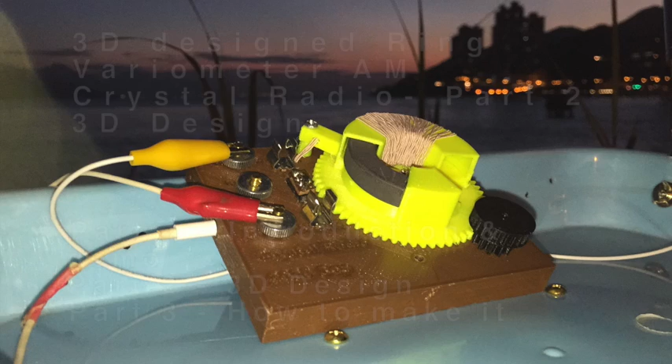So this is the 3D model I created using Fusion 360, and you can see that the joints are in action.

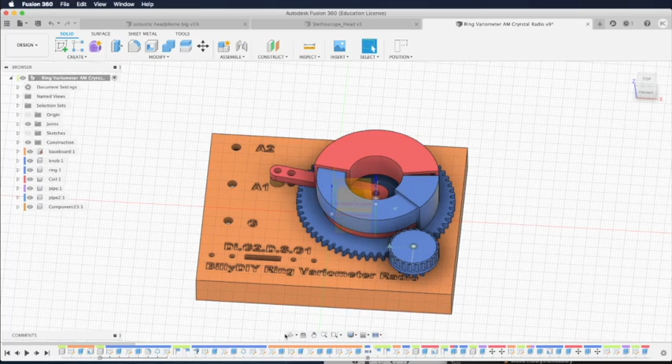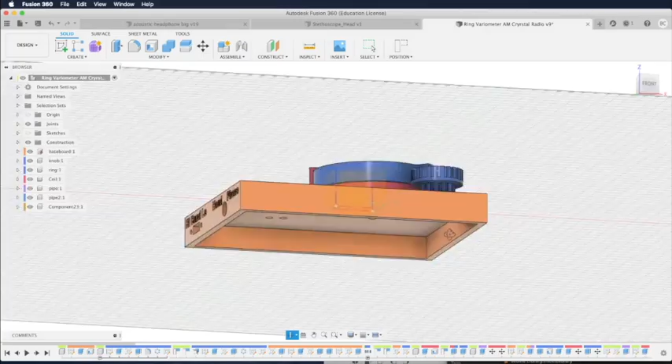So I created this with a hole for the band switch at the side and the headphone. At the bottom, we drill through all the holes for the detectors, crystals, diodes, and MOSFETs. Then there are holes for the pivot of the different gears. We have a small 12-teeth gear as the knob to tune, and then the 16-teeth, 60-teeth bigger spur gear as

the ring. You can adjust this parameter, user-defined parameters, to put in the value for different size of your ferrite core to auto-adjust the model generated. So you can go from a small core to a big core, from a thin core to a thick core in just a few steps.

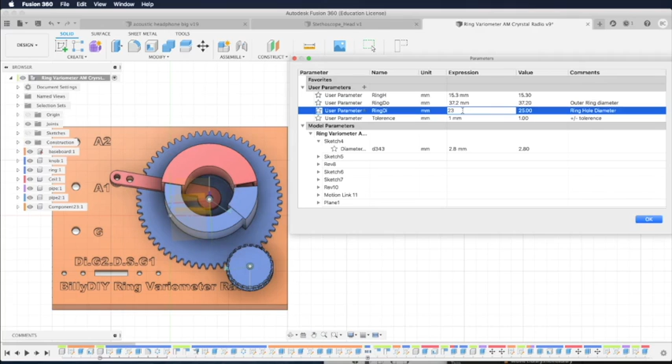But to save your time generating all this, I've created some STL files for 3 common sizes of ferrite core already on the Thingiverse site, so you can just go there and download.

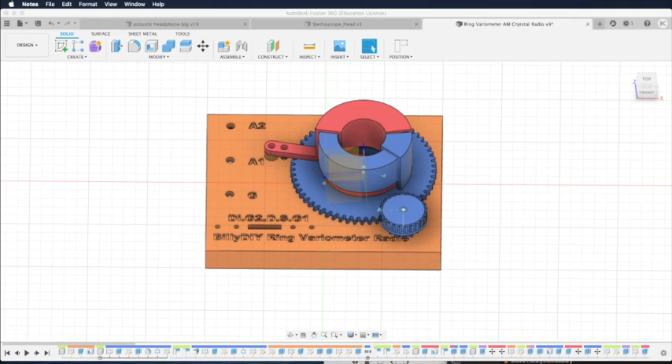Next, I'm going to show you how I create this one step by step. I will be using the video playback function of Fusion 360 to go through the timeline, and I'll describe what happens there. If you want to know the actual commands to type or press to create all this, visit my other 5-part video for the step-by-step guide on how to design the 3D model for the AM crystal radio. Many of the steps are already listed there.

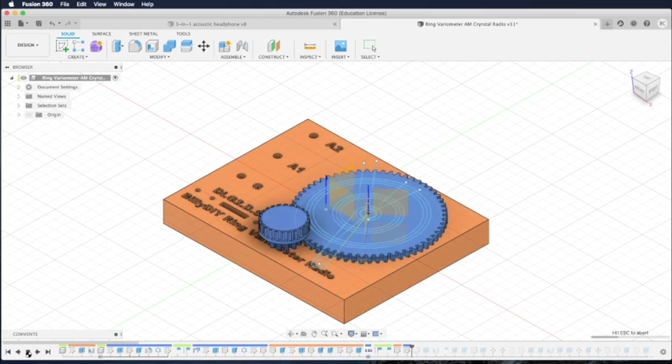So first we create the baseboard through the holes, put in the 12-teeth gear and the 60-teeth gear for the ring, build a core for the frame, for the coil to be wound on, and then we build the mounts for the ferrite core. And we need to lift it a bit because you need to get some airspace between the ring and the coil.

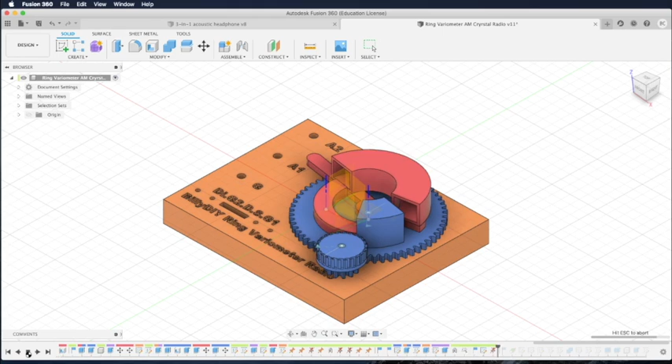Otherwise, there will be no way for the wire of the coils to go. So once you finish all that, I need to worry about how to get the threads from the coil to go through a bar at the top to go down to the baseboard. So that's it. That's how I created this 3D design.